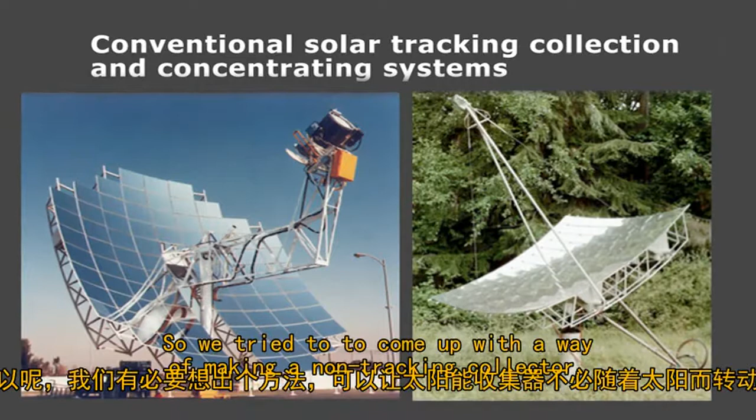So we tried to come up with a way of making a non-tracking collector, a collector that would gather much more than 1 degree of light with no moving parts. So we created this genetic algorithm to try this out. We made a model in Excel of a multi-surfaced reflector, and an amazing thing evolved, literally evolved, from trying a billion cycles, a billion different attempts, with a fitness function that defined how can you collect the most light from the most angles over a day from the sun. And this is the shape that evolved.

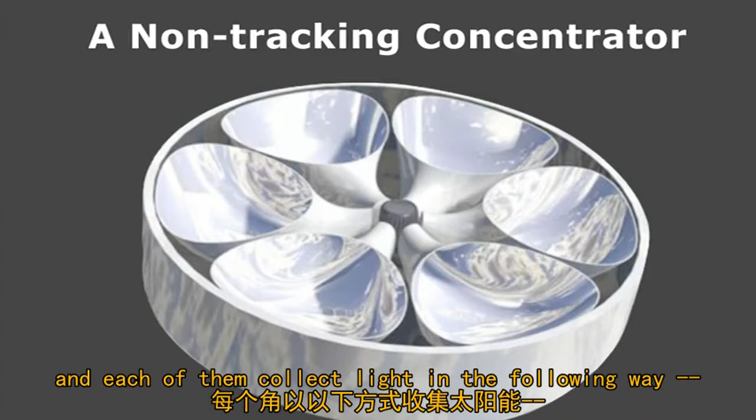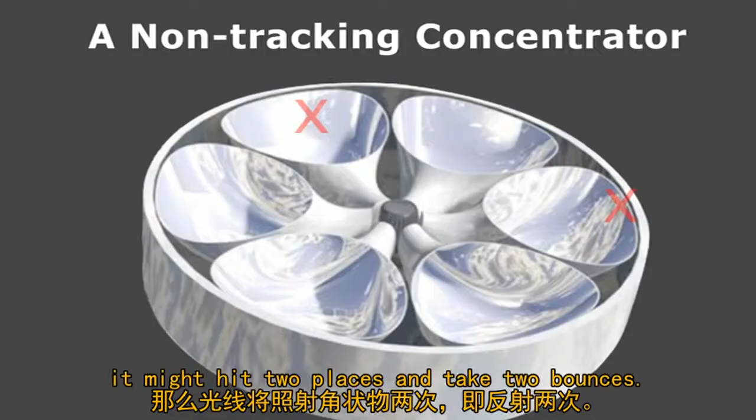It's this non-tracking collector with these 6 tuba-like horns, and each of them collect light in the following way. If the sunlight strikes right here, it might bounce right to the center, the hot spot, directly. But if the sun is off-axis and comes from the side, it might hit 2 places and take 2 bounces. So for direct light, it takes only 1 bounce. For off-axis light, it might take 2, and for extreme off-axis, it might take 3. Your efficiency goes down with more bounces because you lose about 10% with each bounce.

But this allowed us to collect light from a plus or minus 25 degree angle. So about 2.5 hours of the day we could collect with a stationary component. Solar cells collect light for 4.5 hours, though. On an average adjusted day, a solar cell, because the sun's moving across the sky, the solar cell is going down with a sine wave function of performance at the off-axis angles. It collects about 4.5 average hours of sunlight a day.

So even this, although it was great with no moving parts and we could achieve high temperatures, wasn't enough. We needed to beat solar cells. So we took a look at another idea.

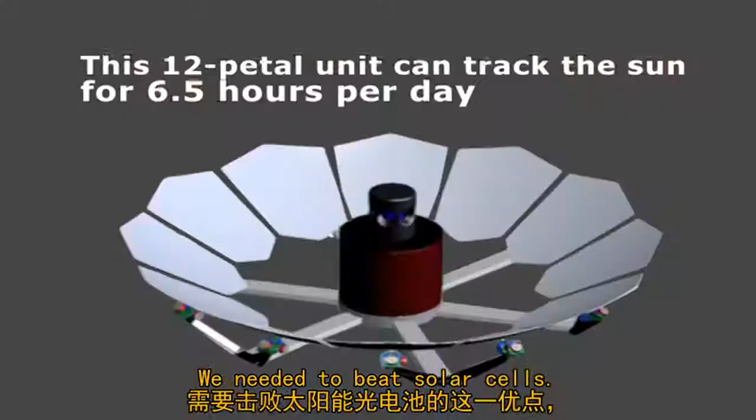We looked at a way to break up a parabola into individual petals that would track. So what you see here is 12 separate petals that each could be controlled with individual microprocessors that would only cost $1. You can buy a 2 megahertz microprocessor for $1 now, and you can buy stepper motors that pretty much never wear out because they have no brushes for $1. So we could control all 12 of these petals for under $50.

And what this would allow us to do is not have to move the focus anymore. We only move the petals. The whole system would have a much lower profile, but also we could gather sunlight for 6.5 to 7 hours a day. Now that we have concentrated sunlight, what are we going to put at the center to convert that to electricity? So we tried to look at all the different heat engines that have been used in history to try and convert sunlight to electricity, or heat to electricity.

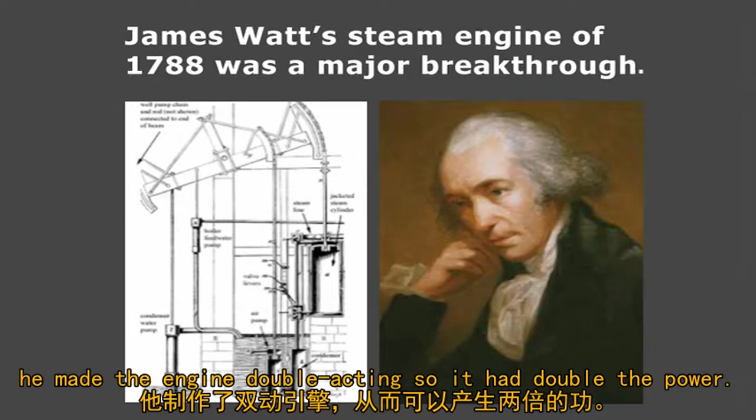And one of the great ones of all time, James Watt's steam engine of 1788 was a major, major breakthrough. James Watt didn't actually invent the steam engine, he just refined it, but his refinements were incredible. He added new linear motion guides to the pistons, he added a condenser to cool the steam outside the cylinder, he made the engine double acting so it had double the power. Those were major breakthroughs. I'm in awe of the improvements he made, and it's justifiable that our measure of energy is the watt today that's named after him.

So we looked at this engine, and this had some potential. Steam engines are great, and they had tremendous impact on the world, as you know, Industrial Revolution and ships and locomotives, but they're usually good to be large, so they're not good for distributed power generation. They're also very high pressure, so they're dangerous.

Another type of engine is the hot air engine. And the hot air engine also was not invented by Robert Stirling, but Robert Stirling came along in 1816 and radically improved it. This engine, because it was so interesting, because it only worked on air, no steam, has led to hundreds of creative designs over the years that use the Stirling engine principle.

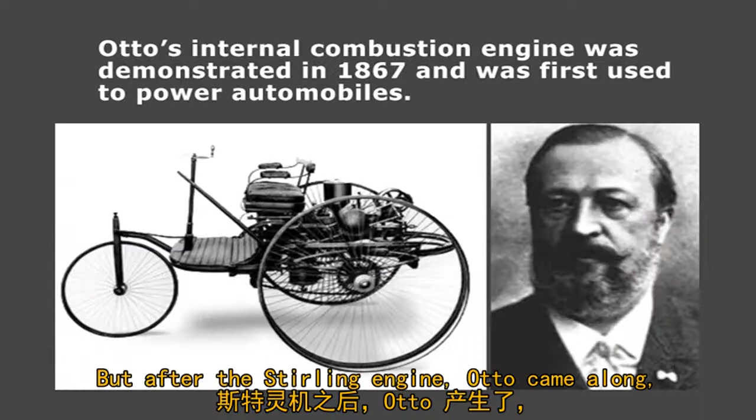But after the Stirling engine, Otto came along, and also he didn't invent the internal combustion engine, he just refined it. He showed it in Paris in 1867, and it was a major achievement because it brought the power density of the engine way up. You could now get a lot more power in a lot smaller space, and that allowed the engine to be used for mobile applications. So once you have mobility, now you're making a lot of engines because you've got lots of units as opposed to steamships or big factories where you're not making as many units.

So this was the engine that ended up benefiting from mass production, where all the other engines didn't benefit. So because it went into mass production, costs were reduced, 100 years of refinement, emissions were reduced, tremendous production volume. There have been hundreds of millions of internal combustion engines built compared to thousands of Stirling engines built, and not nearly as many small steam engines being built anymore, only large ones for big operations.

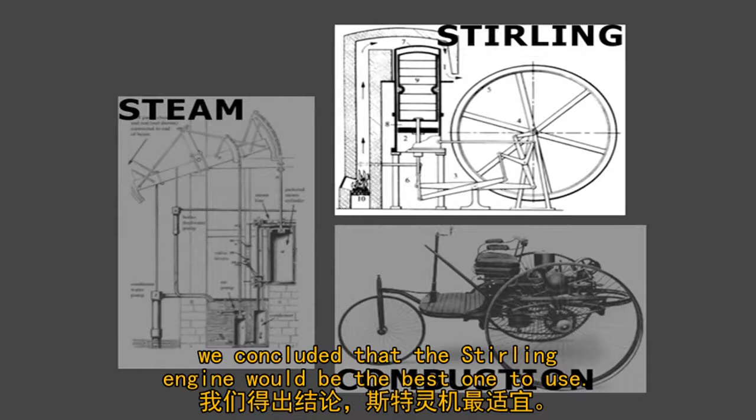So after looking at these 3 and 47 others, we concluded that the Stirling engine would be the best one to use. I want to give you a very brief explanation of how we looked at it and how it works. So we tried to look at the Stirling engine in a new way because it was impractical. Weight no longer mattered for our application. The internal combustion engine took off because weight mattered because you were moving around. But if you're trying to generate solar energy in a static place, the weight doesn't matter so much.

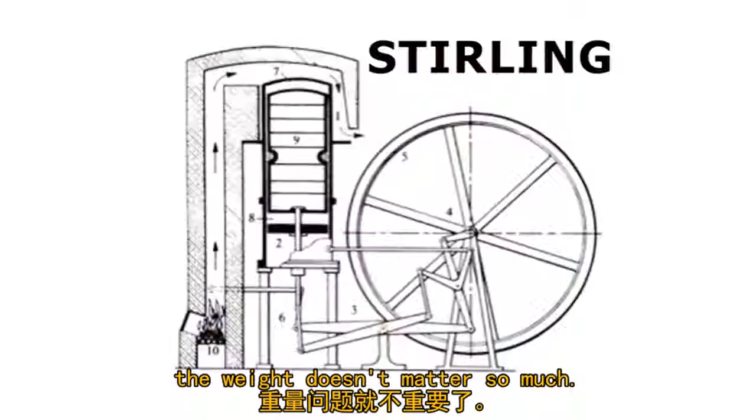The other thing we discovered was that efficiency doesn't matter so much if your energy source is free. Normally, efficiency is crucial because the fuel cost of your engine over its life dwarfs the cost of the engine. But if your fuel source is free, then the only thing that matters is the upfront capital cost of the engine. So you don't want to optimize for efficiency, you want to optimize for power per dollar. So using that new twist with the new criteria, we thought we could re-look at the Stirling engine and also bring genetic algorithms in.

Basically, Robert Stirling didn't have Gordon Moore before him to get us 3 gigahertz of processor power. So we took the same genetic algorithm that we used earlier to make that concentrator, which didn't work out for us, to optimize the Stirling engine and make its design sizes and all of its dimensions the exact optimum to get the most power per dollar, irrespective of weight, irrespective of size, just to get the most conversion of solar energy because the sun is free. And that's the process we took.

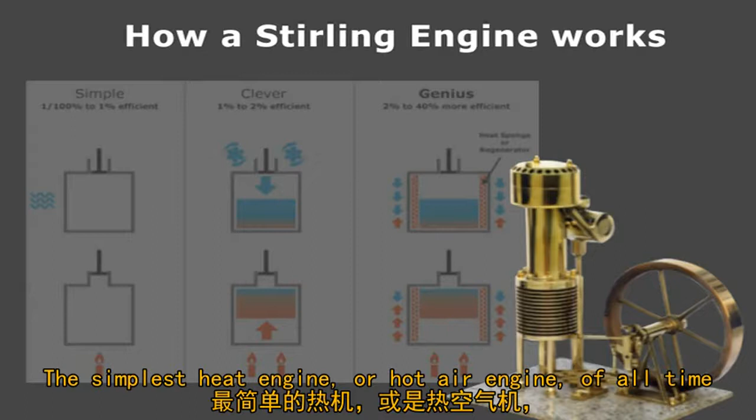Let me show you how the engine works. The simplest heat engine or hot air engine of all time would just be this. Take a box, a steel canister, with a piston. Put a flame under it, the piston moves up. Take it off the flame and pour water on it or let it cool down, the piston moves down. That's a heat engine. That's basically the most fundamental heat engine you could possibly have.

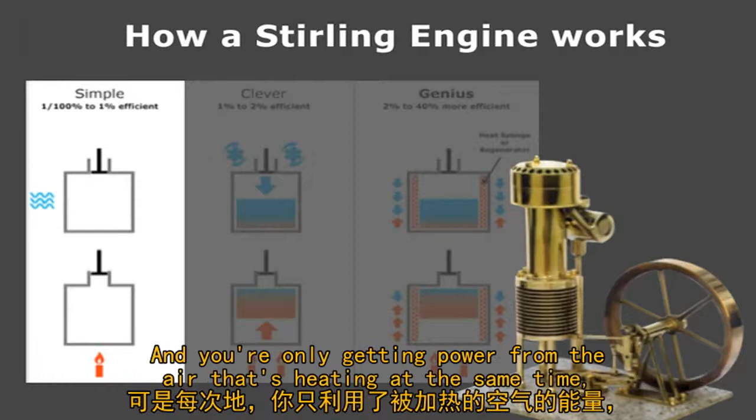The problem is the efficiency is 1/100th of 1% because you're heating all the metal of the chamber and then cooling all the metal of the chamber each time. And you're only getting power from the air that's heating at the same time, but you're wasting all the energy heating the metal and cooling the metal.

So someone came up with a very clever idea to, instead of heating the whole cylinder and cooling the whole cylinder, what about if you put a displacer inside, a little thing that shuttles the air back and forth? You move that up and down with a little bit of energy, but now you're only shifting the air down to the hot end and up to the cold end, down to the hot end and up to the cold end. So now you're not alternately heating and cooling the metal, you're just alternately heating and cooling the air. That allows you to get the efficiency up from 1/100th of a percent to about 2%.

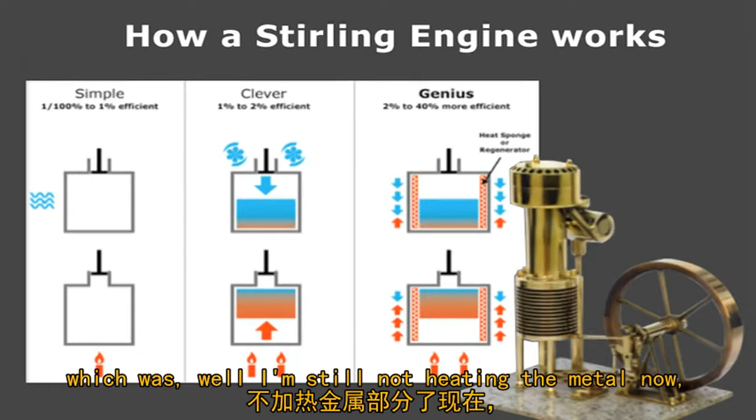And then Robert Stirling came along with this genius idea, which was, well, I'm still not heating the metal now with this kind of engine, but I'm still reheating all the air. I'm still heating the air every time and cooling the air every time. What about if I put a thermal sponge in the middle, in the passageway between where the air has to move between hot and cold? So he made fine wires and cracked glass and all different kinds of materials to be a heat sponge.

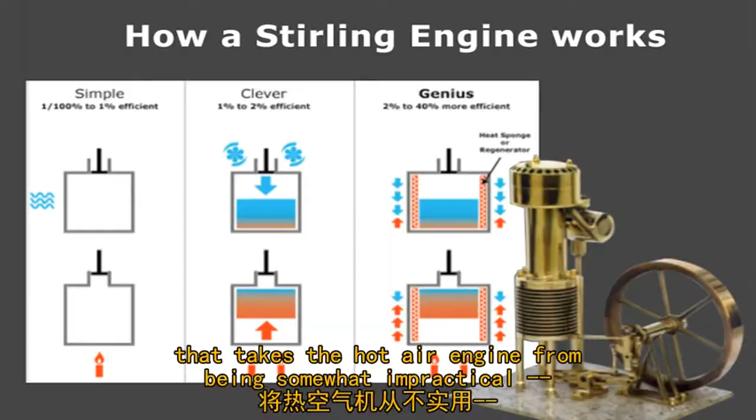So when the air pushes up to go from the hot end to the cold end, it puts some heat into the sponge. And then when the air comes back after it's been cooled, it picks up that heat again. So you're reusing your energy 5 or 6 times. And that brings the efficiency up to between 30 and 40%. It's a little known but brilliant genius invention of Robert Stirling that takes the hot air engine from being somewhat impractical, like I found out when I made the real simple version in high school, to very potentially possible once you get the efficiency up, if you can design this to be low enough cost.

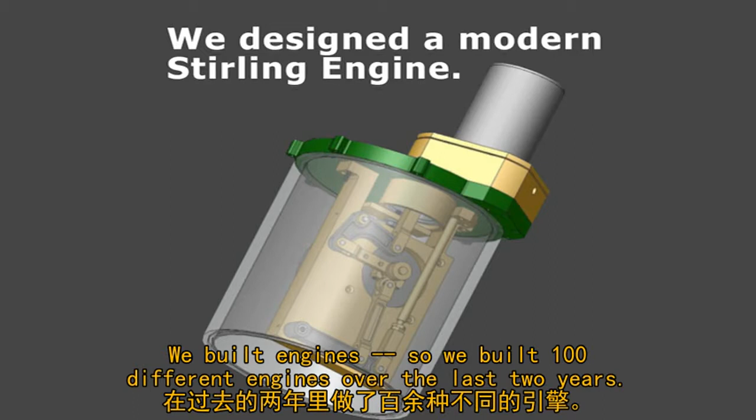So we really set out on a path to try and make the lowest cost possible. We built a huge mathematical model of how a Stirling engine works. We applied the genetic algorithm. We got the results from that for the optimal engine. We built engines. So we built 100 different engines over the last 2 years. We measured each one. We readjusted the model to what we measured, and then that led to the current prototype. It led to a very compact, inexpensive engine. And this is what the engine looks like. Let me show you what it looks like in real life.

So this is the engine. It's just a small cylinder down here which holds the generator inside and all the linkage, and it's the hot cap, the hot cylinder on the top. This part gets hot, this part is cooled, and electricity comes out. The exact converse is also true. If you put electricity in, this will get hot and this will get cold, you get refrigeration. So it's a completely reversible cycle, a very efficient cycle, and quite a simple thing to make.

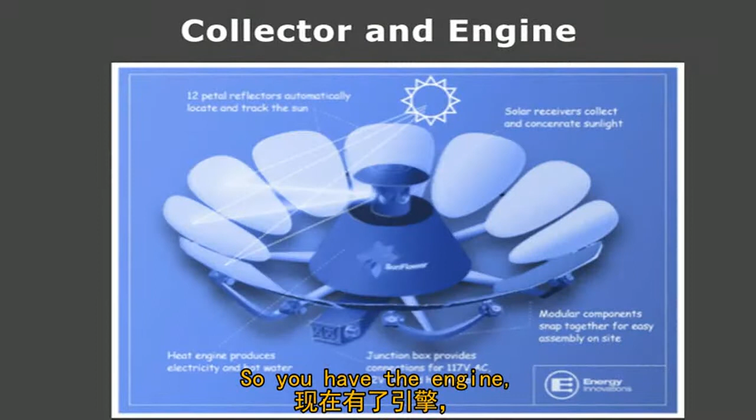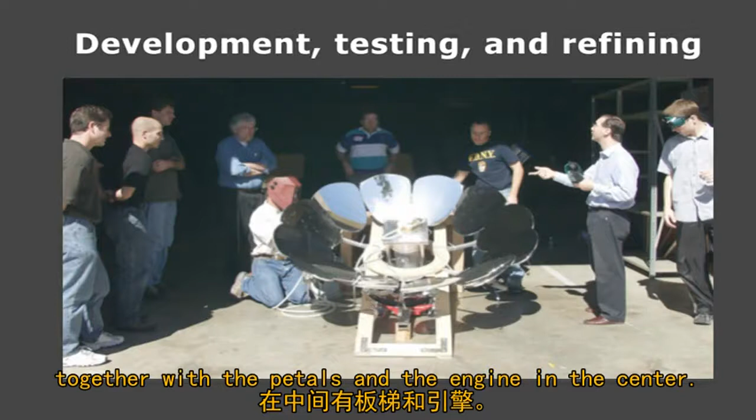So now you put the two things together. So you have the engine. Now what if you combine the petals and the engine in the center? The petals track, and the engine gets the concentrated sunlight, takes that heat, and turns it into electricity. This is what the first prototype of our system looked like, together with the petals and the engine in the center. This is being run out in the sun. And now I want to show you what the actual thing looks like.

Thank you. So this is a unit with the 12 petals. These petals cost about $1 each. They're lightweight injection molded plastic, aluminized. The mechanism to control each petal is below there with a microprocessor on each one. There are thermocouples on the engine, little sensors, that detect the heat when the sunlight strikes them. So each petal adjusts itself separately to keep the highest temperature on that.

When the sun comes out in the morning, the petals will seek the sun, find it by searching for the highest temperature. About 1.5 minutes or 2 minutes after the rays are striking the hot cap, the engine will be warm enough to start, and then the engine will generate electricity for about 6.5 hours a day, 6.5 to 7 hours as the sun moves across the sky.

A critical part that we can take advantage of when we have these inexpensive microprocessors is each one of these petals is autonomous, and each one of these petals figures out where the sun is with no user setup. So you don't have to tell what latitude, longitude you're at. You don't have to tell what your roof slope angle is. You don't have to tell what orientation. It doesn't really care. What it does is it searches to find the hottest spot.

It searches again a half an hour later. It searches again a day later. It searches again a month later. It basically figures out where on Earth you are by watching the direction the sun moves. So you don't have to actually enter anything about that.

The way the unit works is when the sun comes out, the engine will start and you get power out here. We have AC and DC, you get 12 volts DC, so that could be used for certain applications. We have an inverter in there, so you get 117 volts AC. And you also get hot water.

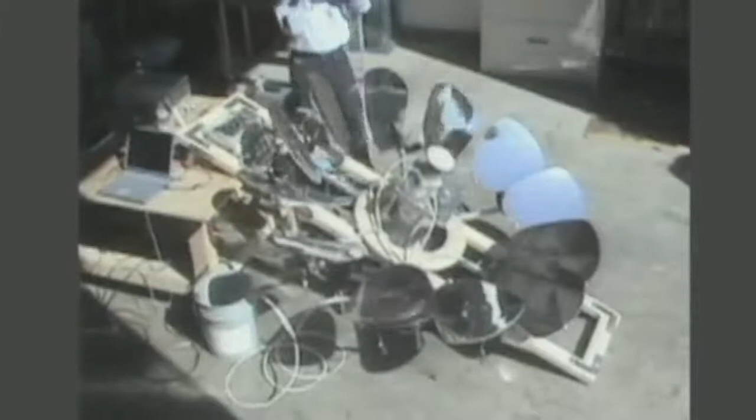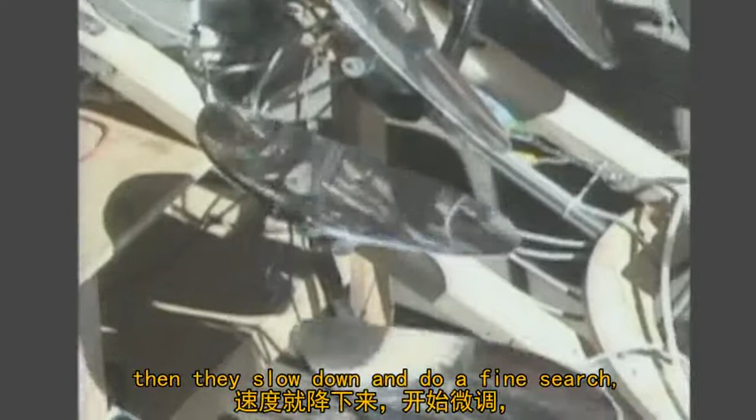So this is the first test where we took it outside and each of the petals were individually seeking, and what they do is step very coarsely at first and then very finely afterwards. Once they get a temperature reading on the thermocouple indicating they found the sun, then they slow down and do a fine search, and then all the petals will move into position and then the engine will start.

So we've been working on this for the last 2 years. We're very excited about the progress. We do have a very long way to go though still, and let me tell you a little bit more about that. This is how we envision it would be in a residential installation. You'd probably have more than one unit on your roof. It could be on your roof or in your backyard or somewhere else.

You don't have to have enough units to power your entire house. You just save money with each incremental one you add. So you're still using the grid potentially in this type of application to be your backup supply. Of course, you can't use these at night, and you can't use these on cloudy days.

But by reducing your energy use pretty much at the peak times, usually when you have your air conditioning on or other times like that, this generates the peak power at the peak usage time. So it's very complementary in that sense. This is how we would envision a residential application.

So an example of that is, here's the map of the United States. Pretty much everywhere that's not green or blue is a really ideal place, but even the green or blue areas are good, just not as good as the places that are red, orange, and yellow. But the hot spot right around Las Vegas and Death Valley in that area is very, very good.

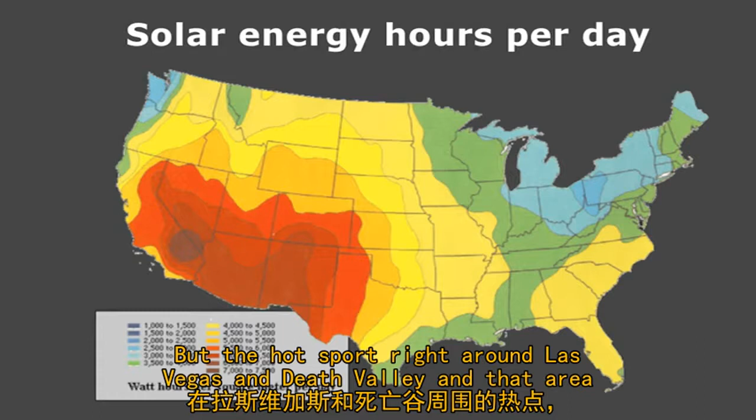And all this does is affect the payback period. It doesn't mean that you couldn't use solar energy. You could use solar energy anywhere on Earth. It just affects the payback period if you're comparing to grid-supplied electricity. But if you don't have grid-supplied electricity, then the whole question of payback is a different one entirely. It's just how many watts do you get per dollar, and how could you benefit from that using that power to change your life in some way.

This is the map of the United States. This is the map of the whole Earth. And again, you can see a huge swath of the middle of pretty much where a large part of the population is. There's tremendous chances for solar energy. And of course, look at Africa. It's just unbelievable what the potential is to take advantage of solar energy there. And I'm really excited to talk more about finding ways we can help with that.

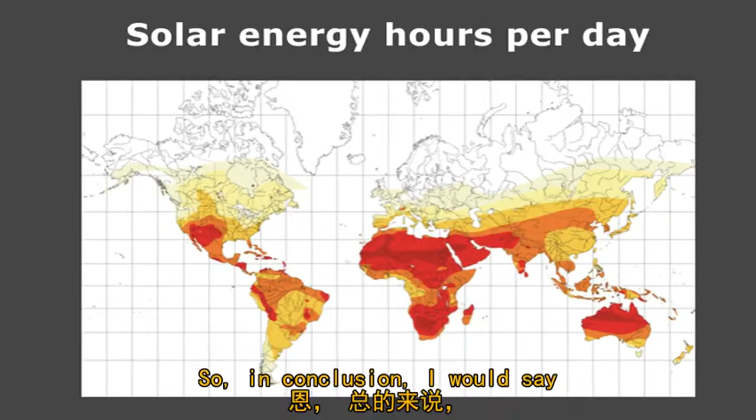So in conclusion, I would say, my journey has shown me that you can revisit old ideas in a new light. And sometimes ideas that have been discarded in the past can be practical now if you apply some new technology or a new twist. We believe we're getting very close to something practical and affordable. Our short-term goal for this is to be half the price of solar cells, and our longer-term goal is to be less than a 5-year payback.

And at less than a 5-year payback, all of a sudden this becomes very economic. So you don't have to just want to have a feel-good attitude about energy to want to have one of these. It just makes economic sense. Right now, solar paybacks are between 30 and 50 years. If we get it down below 5 years, then it just becomes almost a no-brainer, because someone else will finance it for you, and you can just make money basically from day one. So that's our real powerful goal that we're really shooting for at the company.

Two other things that I learned that were very surprising to me. One was how casual we are about energy. I was walking from the elevator over here and even just looking at the stage right now. So there's probably 20 500-watt lights right now. There's 10,000 watts of light pouring on the stage. 1 horsepower is 746 watts at full power. So there's basically 15 horses running at full speed just to keep the stage lit.

Not to mention the 200 horses that are probably running right now to keep the air conditioning going. And it's just amazing. Just walk in the elevator and there's lights on in the elevator. Of course, now I'm very sensitive at home when we leave the lights on by mistake. But everywhere around us, we have insatiable use for energy because it's so cheap. And it's cheap because we've been subsidized by energy that's been concentrated by the sun. Basically, oil is solar energy concentrate.